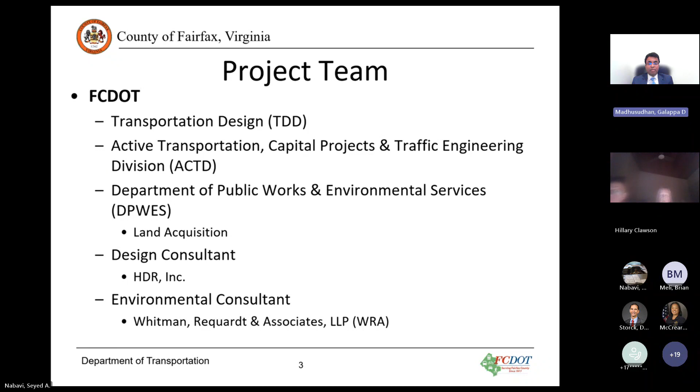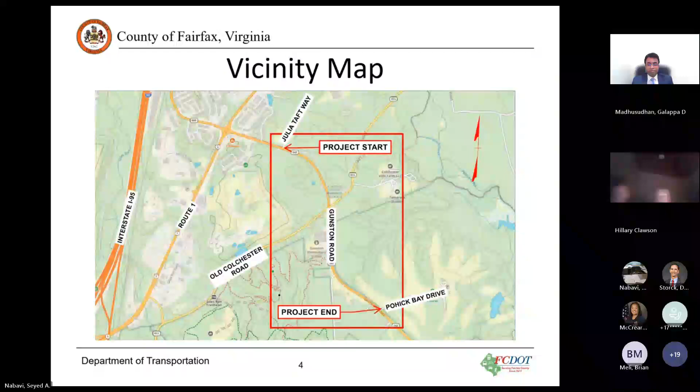And meets Old Gunston Road. Since we are converting and repurposing a majority of Old Gunston Road for the shared use path, it will help reduce the cost of the project since we're utilizing the existing roadway bedding.

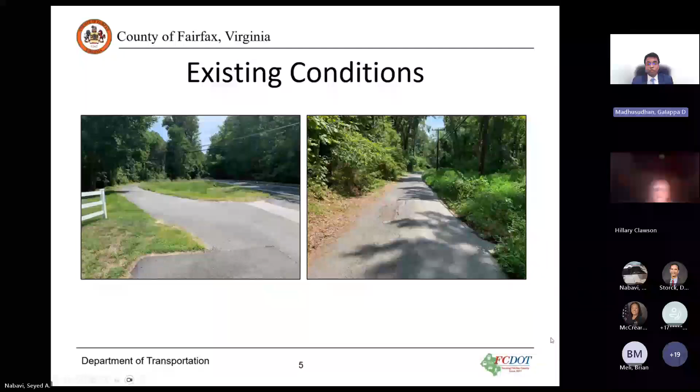The image on the left highlights a section of Old Gunston Road as it connects back to Gunston Road. This portion of Old Gunston Road will be maintained to provide access to the two properties located here. The shared use path will veer to the right and be placed between Old Gunston Road and Gunston Road.

The image on the right highlights a section of Gunston Road immediately after the end of Old Gunston Road. The project will construct the shared use path along Gunston Road in this area.

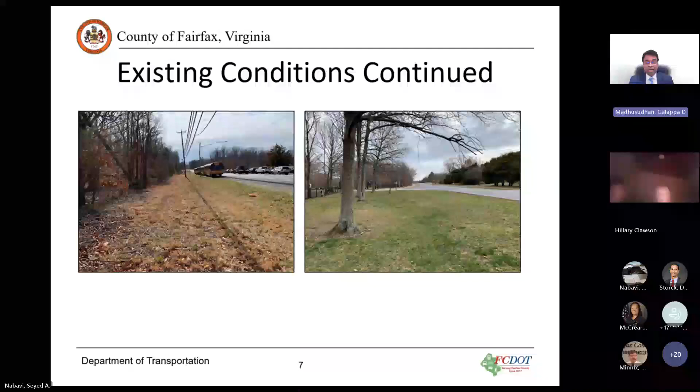The image on the right highlights the end of the project, where our proposed shared use path will meet and connect to the existing trail at Pohick Bay Drive.

So the purpose and need of this project: since there is a lack of pedestrian facility right now between Julia Taft Way and Pohick Bay Drive, by filling this gap and tying into asphalt shared use path at either end of the project, we are providing connectivity all the way from Julia Taft Way to the schools, bike trails, and state parks.

And also we're making sure we're enhancing safety. Apart from having a wider separation, we want to make sure there are ADA compliant ramps at every street crossing and driveway entrance, and as part of the school bus parking, we're providing 12-foot paved parking.

Retaining walls are needed due to grading challenges along the corridor, and we are trying to minimize impacts to property owners by adding retaining walls at certain sections. For drainage, we are trying to use the existing drainage system, the open ditches and culverts, to the eventual outfalls.

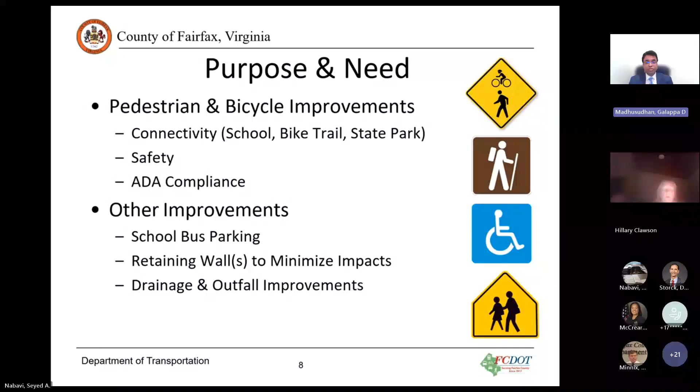For design details: here we have a 10-foot shared use path with a 2-foot graded shoulder. The alignment follows Old Gunston Road at the very beginning of the project, then meanders away from it, maintaining at least a 10-foot separation. It connects from Julia Taft Way all the way to Pohick Bay Drive.

And as I said before, it connects all the major landmarks, starting from Julia Taft Way to the elementary school, to the state parks, and the bike trails.

For drainage, as I mentioned, we are using the existing open ditches and culverts. We have two major drainage structures, basically extensions of culverts, in two places. We're also providing stormwater management facilities along the corridor, which still need to be evaluated, and based on that we might eliminate some of them.

As part of the NEPA documentation process, since federal funds are involved, we're also conducting a cultural resources survey on this project.

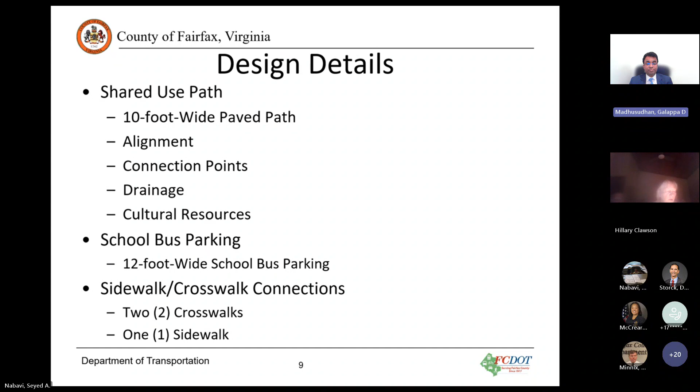As I mentioned before, we have a 12-foot wide school bus parking area there. We also have two crosswalks, one connecting to the school and one connecting to the Meadowood bike trail, and one sidewalk connection between the trail and the school. That's where we're increasing the connectivity, which is what I was trying to say there.

Now, going back to the design details here, it gives you some of the major landmarks.

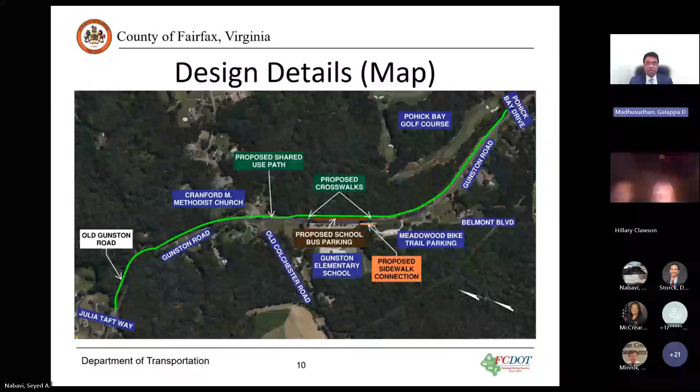The one in green is the old Gunston Road, and the proposed shared use path. Along the path is the Cranford Methodist Church, the Gunston Elementary School, the proposed school bus parking, and the sidewalk connection. Also shown are the proposed crosswalks and mid-block crossings, one to the school and one to the trail. And Belmont Boulevard is here.

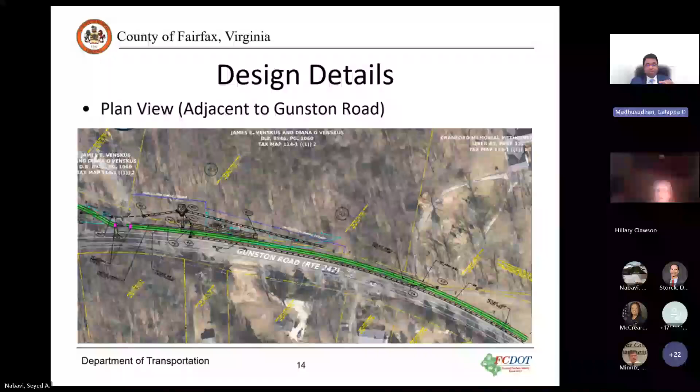In this section, you're seeing some of the drainage improvements we're doing along the corridor. This is the 16-inch RCP pipe we're extending, basically to bring it up to grade, because Gunston Road will be at a higher elevation compared to the shared use path. We had to bring it to grade, so we had to extend the culvert 30 to 35 feet. We also have detention basins in this area, which means we're adding more water, so we're trying to do some drainage improvements here.

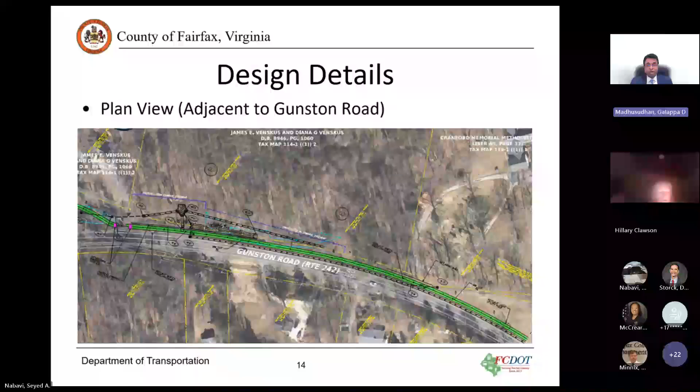We're also adding a retaining wall right adjacent to the Cranford Methodist Church to avoid impacts to cemetery. So we are doing our best to avoid impacts to property owners as much as we can, even though we have significant grading challenges along the corridor. And the one in green runs all the way.

In the next slide, you'll see again the shared use path with a 2-foot graded shoulder and the existing Gunston Road. It also shows the separation we're trying to maintain, at least 10 feet, which means we're adding safety for the pedestrians and bicyclists using the shared use path.

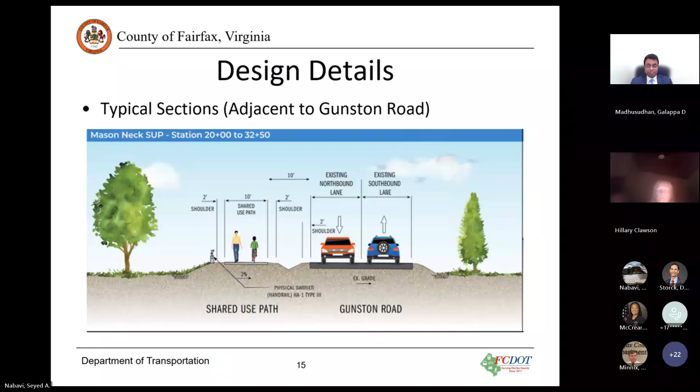In this section, right across from Gunston Elementary School, we're adding a 12-foot paved shoulder for bus parking. You'll also see two crosswalks, one to the school and one to the Meadowood bike trail, as well as a series of stormwater management facilities which, like I said before, might be eliminated later. We're just reserving the space for now, but we're still evaluating it. Based on the feasibility studies, we'll figure out if we need them or not.

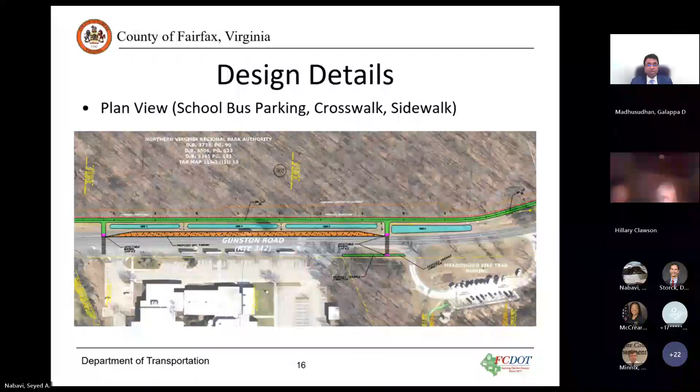On this typical section, you're seeing the school bus parking as well as the shared use path with the wider separation and also the existing Gunston Road.

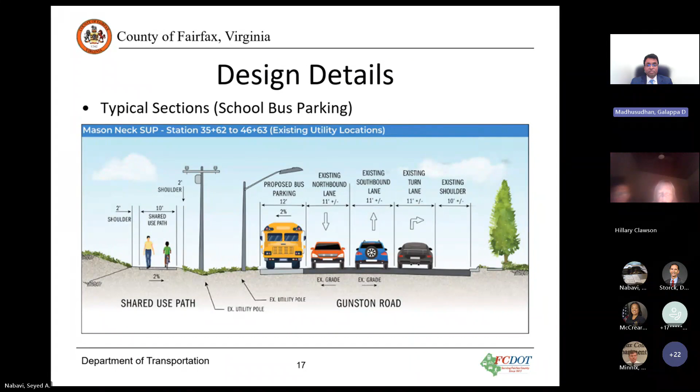Since we have federal funds involved, we're also trying to follow the NEPA documentation process for this project. That means we're doing the cultural resources survey, parks and recreation resources, threatened and endangered species, wetlands and streams. The county will be coordinating with VDOT to complete the environmental review process under NEPA, and the county will obtain permits for all impacts to regulated resources and comply with all applicable laws, regulations, and policies.

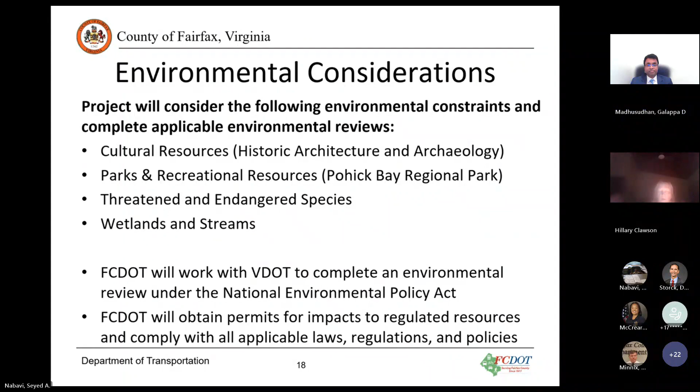Now, regarding the impacts, like I said, there are significant grading challenges. We have tried our best to avoid impacts to property owners, and wherever feasible, we have tried to avoid them. We have provided retaining walls.

The properties impacted directly are the Northern Virginia Regional Park Authority, a development property northwest of Cranford Memorial Methodist Church, and a property south of Old Colchester Road. The other properties which are not adversely impacted are the Cranford Memorial Methodist Church, where we're providing a retaining wall in front of them, and the first two properties at the beginning of the project, 9845 Gunston Road and 9915 Gunston Road. These two properties are not directly impacted, but we are going by their properties.

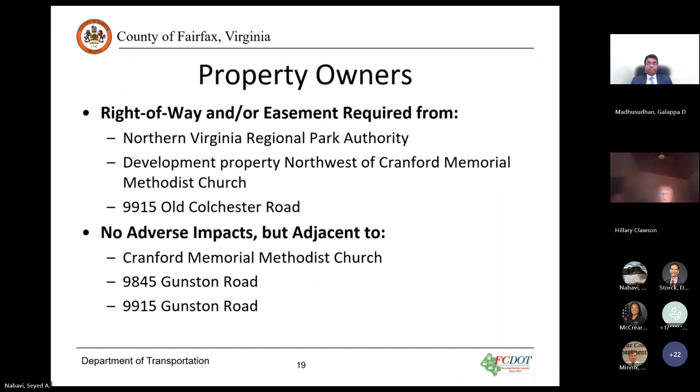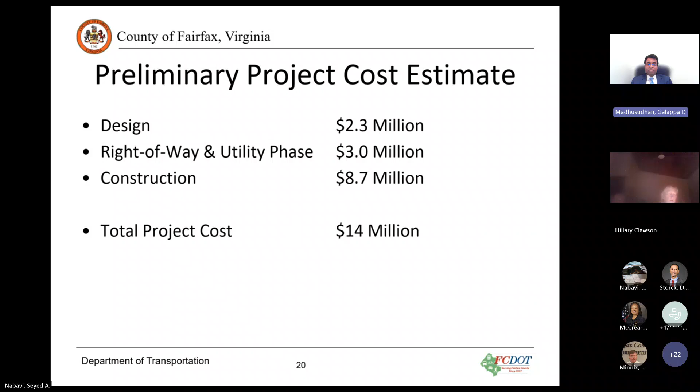The preliminary cost estimate we have right now for design is about $2.3 million. For the right-of-way and utility phase, we have $3 million. The construction phase is about $8.7 million, adding up to a total of $14 million. The board has not approved this yet; this is based on a coordination meeting with VDOT and the county, so this amount is still not approved. Just letting you know in advance.

The anticipated schedule for this project: pre-final design will be in February 2026. Land acquisition begins September 2026 and ends June 2027. Utility relocation runs July 2027 to January 2029. Final plans are due July 2027. Construction award is February 2029, and construction ends August 2030. Again, this is a very tentative schedule because the design is still evolving and under review, so these dates might change significantly. We might be way ahead of schedule as well.

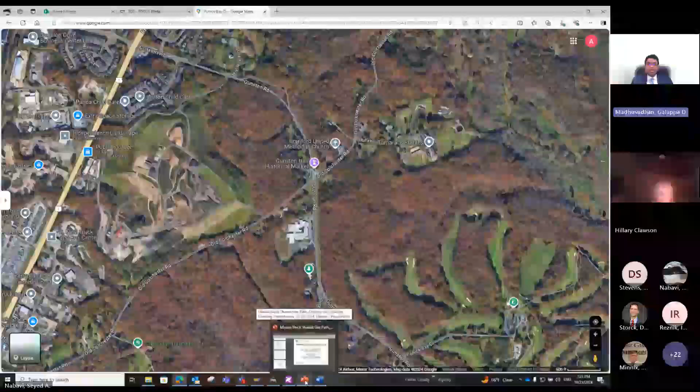There's something we can consider for the next phase, depending on the feasibility of doing that. I do remember talking to you, Mr. Igor, about this, but definitely we can consider your request, and we'll let you know as we progress, or maybe we can incorporate that into the next phase of design.

The next question I have is, why is this an FCDOT project and not a VDOT project?

Dan or Todd, do you guys want to respond to that? Gosh, that's a good question, that's a difficult question to answer. VDOT is really in the business of building roads, and trails of this type are typically not their bailiwick, or they prefer that localities do it, so that, for example, we get public input such as this, more so than they do in some respects. They prefer to have us do these smaller projects because they have bigger fish to fry, so to speak.

Yeah, they tend to do the really big regional projects, like the I-66 parallel trail. That was part of that project. So they built that as part of that. There are a few others they are doing, there's one on Compton Road that's tied to the I-66 widening, going up towards Bull Run Regional Park underneath I-66. There's a connection there that they are doing, but again that was tied to some of the requirements the county put on VDOT in order to proceed with I-66. I don't think requirements is the right word, but it was some of the asks that the county had for VDOT to do these additional projects in the process of doing the I-66 widening, for example.

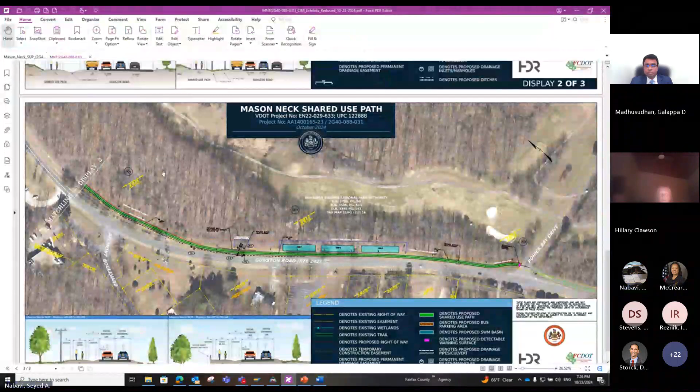So this is at the area of Old Colchester Road. Brian, do you want to speak to that?

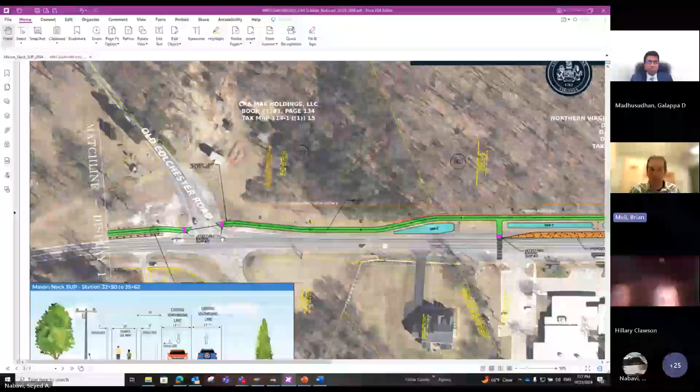Yes, good evening. As you can see in the picture there, we have the detectable warnings, and it is offset from the stop bar. This will certainly be looked at in more detail at the next stage of design, but it is likely that the stop bar and the stop sign will be adjusted to make sure we meet the requirements as far as offset from the stop sign. One of the considerations, of course, will be sight distance for everybody involved, including the pedestrians and the vehicles.

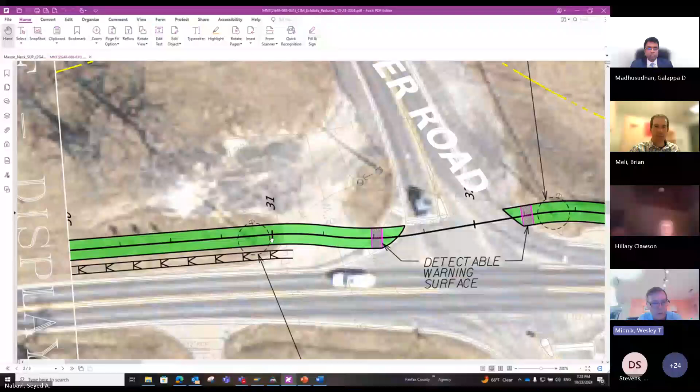All right, next question. If I could just add, in that location there are some utility poles and so forth that we're trying to avoid and go around. There are also several historical markers to the north of Old Colchester that we'll probably have to relocate so they're not right in the middle of the trail as currently designed, but those will be relocated along that parcel in the same general location. We are trying to minimize impacts to the utilities as well, so there may be some adjustments to the design where we go behind some of the power poles, and in some cases we may go in front of them.

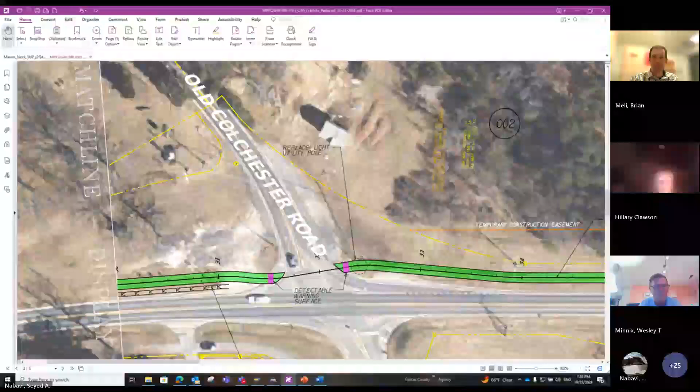All right, next question I have from Mr. J: please make it a standard practice to place the feedback and follow-up info from the slides into the chat, where visitors can cut and paste it rather than laboriously and error-prone transcribe it for use after the meeting. I will do that, I will copy and paste it into the chat.

The question also is sight lines on horseback are often very different from pedestrians, especially with trees and shrubbery. That's a comment taken. Let me see if I have it.

All right, let me bring this up while we are waiting for the next question or comment. I'll copy this and paste it into the chat. So you can use this link to provide comments and questions to us.

Okay, next question I have from Ben Arthur: Is it anticipated that most users of this trail will be commuting to work or recreating to the park?

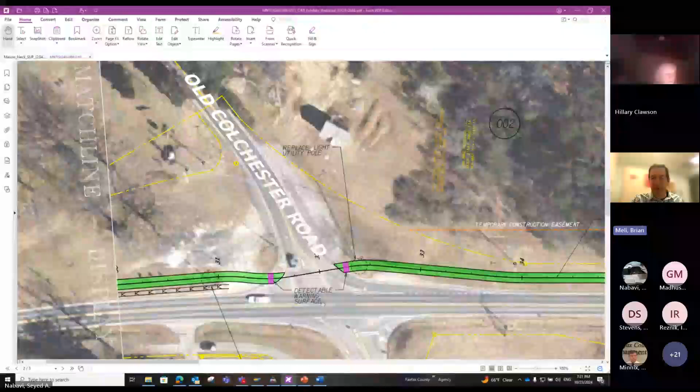Yes, at the next stage of design we are certainly going to consider any enhancements that may be needed for the pedestrian crossings. We'll be utilizing state criteria to determine what that will be. At this stage, the main purpose is to identify the locations of the crossings shown here and consider other comments that have been brought up regarding Belmont Boulevard and other locations. Once those are all decided, then at the next stage of design, additional enhancements regarding the crosswalks will be considered.

I think just to add to that, the crosswalk assessment study has been done only for those two mid-block crossings, and we're not done with extensive study about the remaining at this point. But as Brian said, as we go along the design, we will probably look for the feasibility of other locations as well and do more detailed studies.

All right. Okay, I have a comment from Supervisor Storck: I think it will be used by some school children as well, since Gunston Elementary School boundary includes this Richmond Highway area. Thank you.

So, are there any further questions or comments?